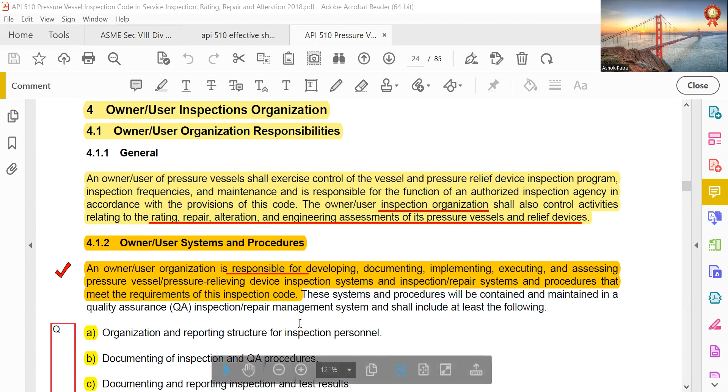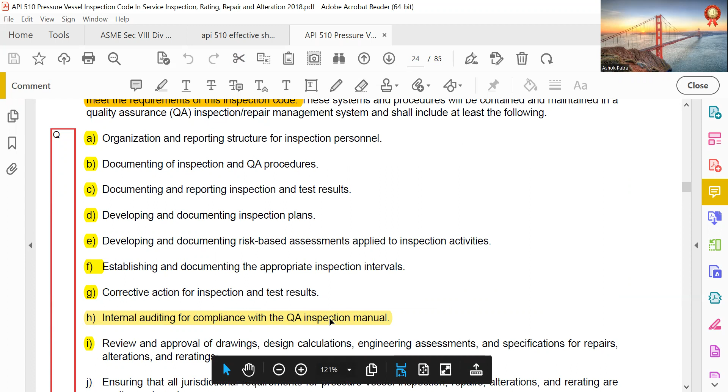So quality assurance system, inspection system will follow these things: organization and reporting structure for inspection personnel; documenting of inspection and QA procedures; documenting and reporting inspection and test results; developing and documenting inspection plans; developing and documenting risk-based assessment applied to inspection activities; establishing and documenting the appropriate inspection intervals; corrective action on inspection and test results, internal auditing and compliance with the QA inspection manual; review and approval of drawing, design, calculation, engineering assessment, and specification for repairs, alteration, and re-rating.

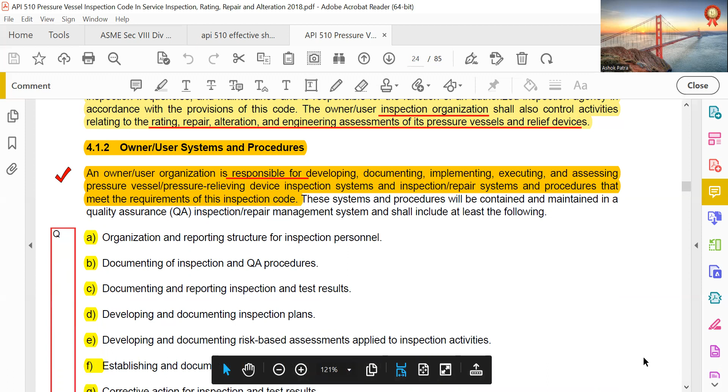Organization and reporting structure for inspection personnel. Documenting of inspection and QA procedures. Documenting and reporting inspection and test result. Developing and documenting inspection plans. Developing, documenting risk-based assessment applied to inspection activities. Establishing and documenting the appropriate inspection intervals. Corrective action for inspection and test results. Internal auditing for compliance with QA inspection manual. Review and approval of drawing, design calculations, engineering assessment, and specification for repair, alteration, re-rating.

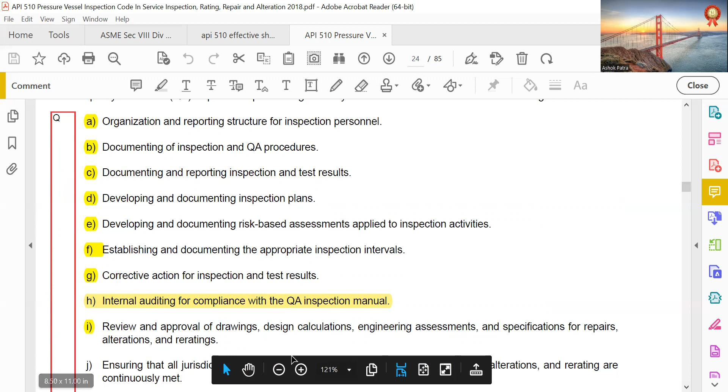Ensuring that all jurisdictional requirements for pressure vessel inspection, repairs, alteration, and re-rating are continuously met. Reporting to the inspector any process changes or other conditions that could affect pressure vessel integrity. Training requirement for inspection personnel regarding inspection tools, techniques, and technical knowledge base.

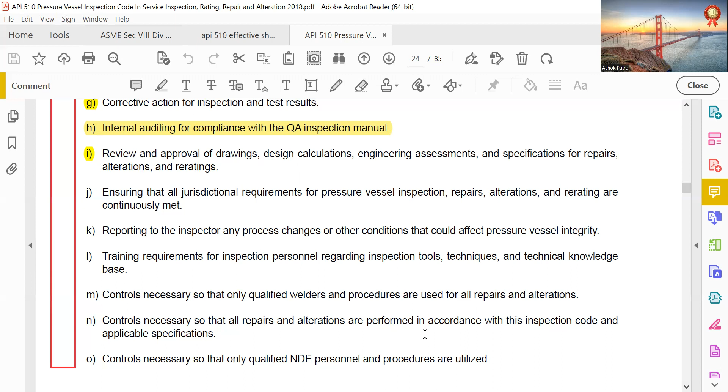Controls necessary so that only qualified welders and procedures are used for all repairs and alterations. Controls necessary so that all repairs and alterations are performed in accordance with this inspection code and applicable specifications. Controls necessary so that only qualified NDE personnel and procedures are utilized. Controls necessary so that only material conforming to the applicable construction code is utilized for repairs and alterations.

Controls necessary so that all inspection, measurement, NDE, and testing equipment are properly maintained and calibrated. Controls necessary so that the work of the contract inspection or repair organization meets the same inspection requirements as the owner user organization. Internal auditing requirements for QC system for pressure relieving devices. Control necessary to ensure that inspectors have the visual acuity necessary to perform their assigned inspection tasks.

Management shall have an appropriate requirement and work process to ensure that inspectors have an annual vision test to ensure that they are capable of reading standard J1 letters on standard Jaeger test type charts for near vision.

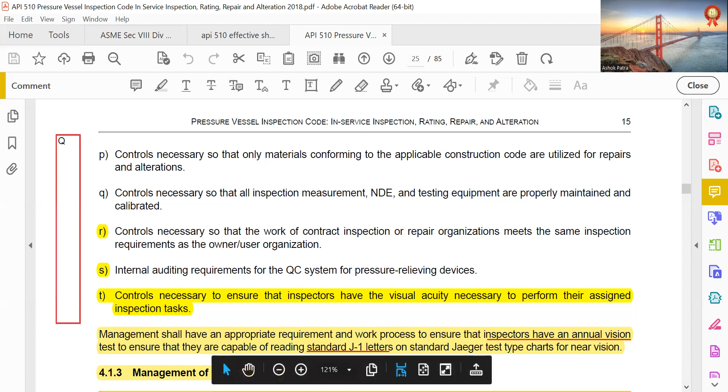Management of change, MOC. The owner user is responsible for implementing and execution of an effective MOC process that reviews and controls changes to the process and to the hardware. An effective MOC review process is vital to the success of any pressure vessel integrity management program, as it allows the inspection group to be able to address issues concerning the adequacy of pressure equipment design and current condition for the proposed changes and anticipated changes in the corrosion and other type of damage, and to update the inspection plan and records to account for those changes.

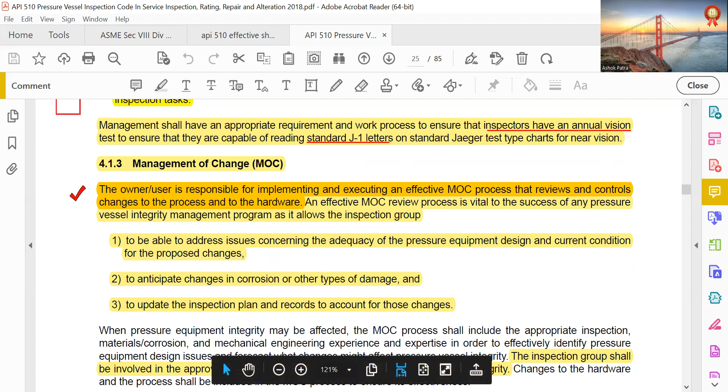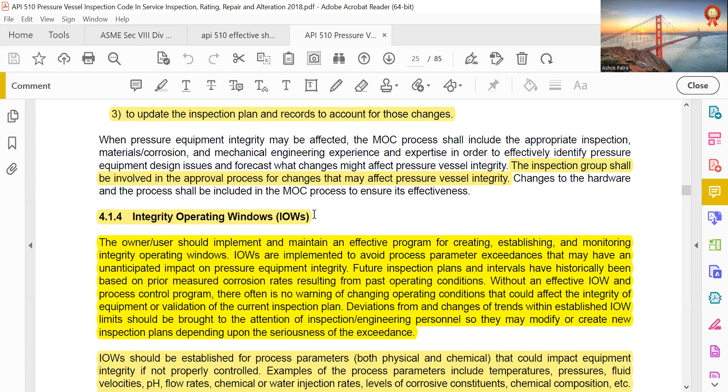The inspection group shall be involved in the approval process for changes that may affect pressure vessel integrity, operating windows, IOW. The owner users should implement and maintain an effective program for creating, establishing, and monitoring integrity operating windows. IOWs are implemented to avoid process parameter exceedance that may have an unanticipated impact on pressure equipment integrity.

Future inspection plan intervals have historically been based on the prior measured corrosion rates resulting from past operating conditions. Without an effective IOW and process control program, there is often no warning of changing operating conditions that could affect the integrity of the equipment or validity of the current inspection plan.

Deviation from the changes or of trends within the established IOW limits should be brought to the attention of inspection engineering personnel, who may modify or create new inspection plans depending upon the seriousness of the deviation. IOW should be established for process parameters, both physical and chemical, that could impact equipment integrity if not properly controlled. Examples of process parameters include temperature, pressure, fluid velocities, pH, flow rates, chemical and water injection rates, level of corrosive constituents, chemical composition, etc.

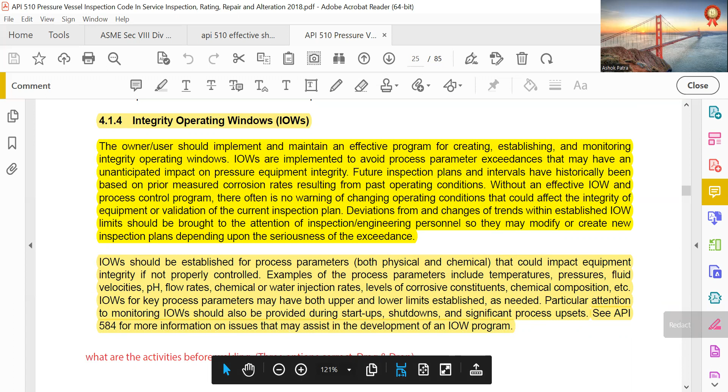What are the activities before welding? Three options correct, drag and drop.

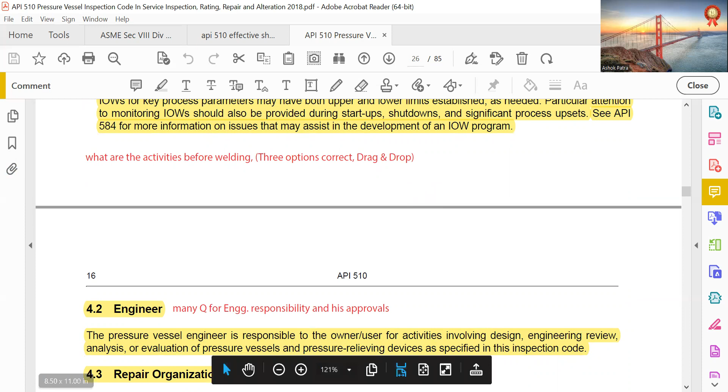Engineer. Responsibility and the approvals. The pressure vessel engineer is responsible to the owner user for activities involving design, engineering, review, analysis, or evaluation of pressure vessels and pressure relieving devices as specified in the inspection code.

The repair organization. All repairs and alterations shall be performed by a qualified repair organization. The repair organization is responsible to the owner user and shall provide the material, equipment, QC, and workmanship necessary to maintain and repair the vessel or pressure-relieving devices in accordance with the requirements of the inspection code.

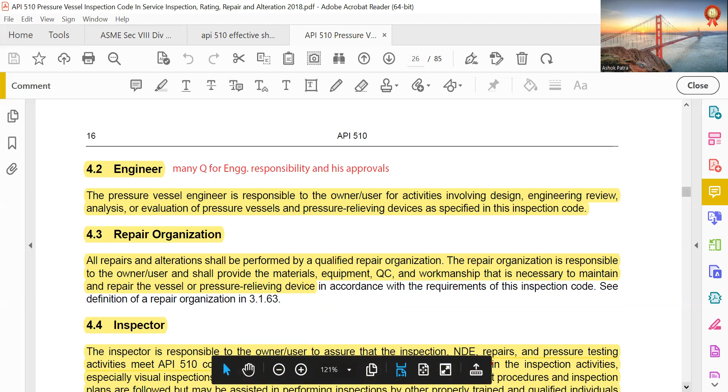Inspector. The inspector is responsible to the owner user to assure that the inspection, NDE, repairs, and pressure testing activities meet API 510 code requirements. The inspector shall be directly involved in the inspection activities, especially visual inspection, and in most cases will require field activities to ensure that procedures and inspection plans are followed.

The inspector may be assisted in performing inspections by other properly trained and qualified individuals who are not inspectors—examiners and operating or maintenance personnel. However, all NDE results shall be evaluated and accepted by the inspector, who will then make appropriate recommendations for repair, replacement, or fitness for continued service.

The inspector shall be certified in accordance with the provisions of Annex B. The inspector can be an employee of the owner user or be a contractor acceptable to the owner user.

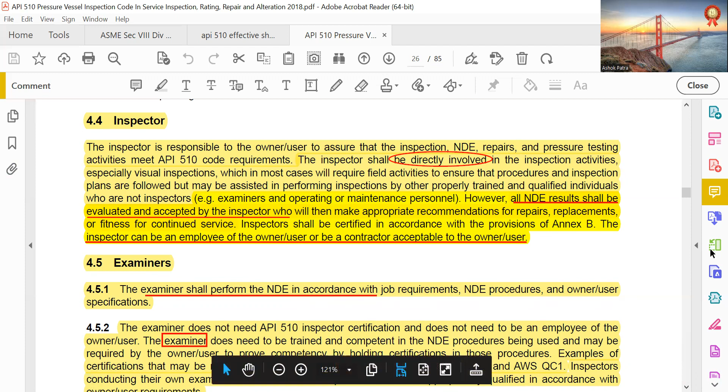Examiner. The examiner shall perform NDE in accordance with job requirements, the NDE procedure, and the owner user specification. The examiner doesn't need API 510 inspector certification and doesn't need to be an employee of the owner user.

The examiner does need to be trained and competent in the NDE procedure being used, and may be required by the owner user to prove competency by holding certification in those procedures. Examples of certifications that may be required include SNT-TC-1A, ASNT CP-189, CGSB, and AWS QC1.

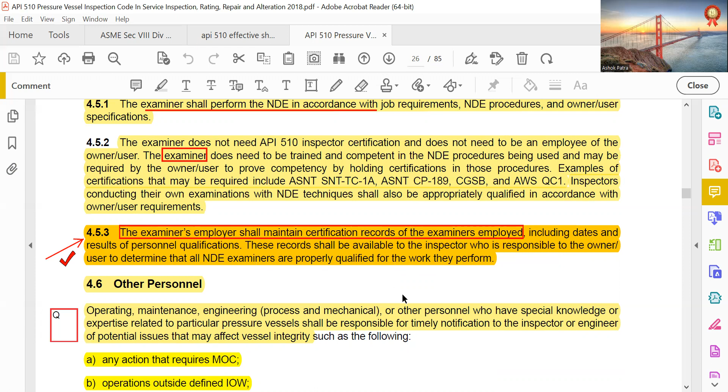Inspectors conducting their own examinations with NDE techniques shall also be appropriately qualified in accordance with owner user requirements. The examiner's employer shall maintain certification records of the examiners employed, including dates and results of the personnel qualification. These records shall be available to the inspector, who is responsible to the owner user to determine all NDE examiners are properly qualified for the work they perform.

Other personnel. Operating, maintenance, engineering, process and mechanical, or other personnel who have special knowledge or expertise related to a particular pressure vessel shall be responsible for timely notification to the inspector or engineer.

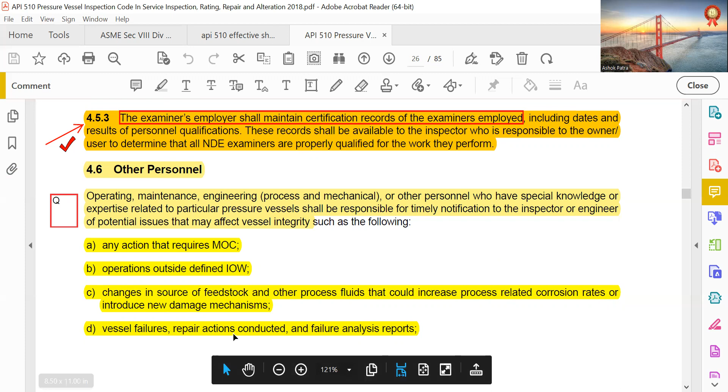Of potential issues that may affect vessel integrity, such as the following: any action that requires MOC, operations outside defined IOW, changes in source of feedstock and other process fluids that could increase process related corrosion rates or introduce new damage mechanisms, vessel failures, repair actions conducted, and failure analysis reports.

Cleaning and decontamination methods used, or other maintenance procedures that could affect pressure vessel integrity. Reports of experience that may come to their attention that other plants have experienced similar or same service pressure vessel failures. Any unusual conditions that may develop: noises, leaks, vibration, movement, insulation damage, external vessel deterioration, support structure deterioration, significant bolting corrosion, etc.

Any engineering evaluation, including fitness-for-service assessment, that might require current or future action to maintain mechanical integrity until the next inspection.

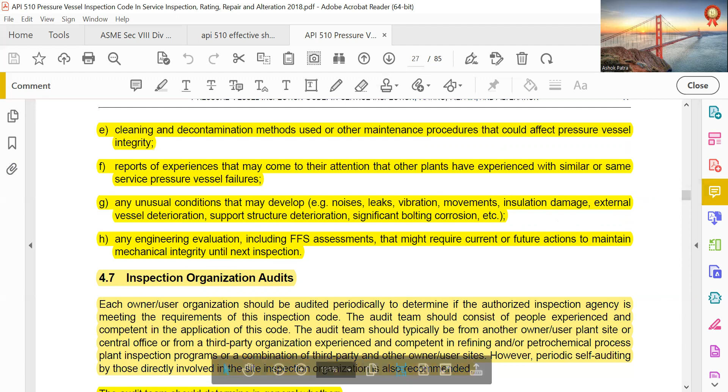Inspection organization and audit. Organization audits. Each owner user organization should be audited periodically to determine if the authorized inspection agency is meeting the requirements of the inspection code. The audit team should consist of people experienced and competent in the application of the code.

The audit team should typically be from another owner user's plant site or central office, or from a third party organization experienced and competent in refining and/or petrochemical process plant inspection programs, or a combination of third party and other owner user sites. However, periodic self-auditing by those directly involved in the site inspection organization is also recommended.

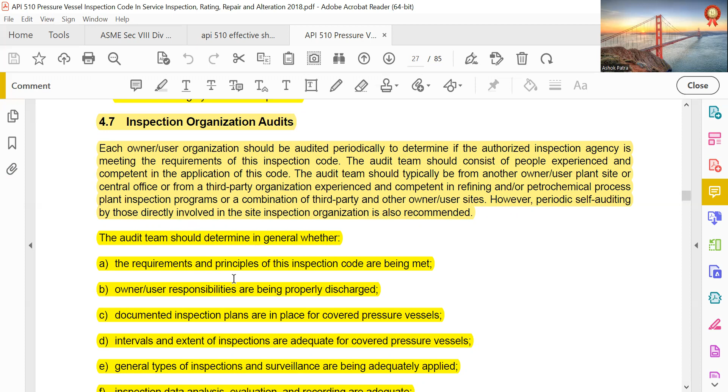The audit team should determine in general whether requirements and principles of the inspection code are being met, owner user responsibilities are being properly discharged, documented inspection plans are in place for covered pressure vessels, and intervals and extent of inspections are adequate for covered pressure vessels.

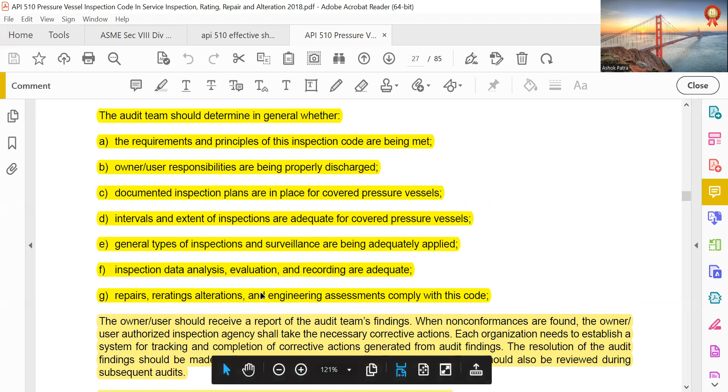General types of inspections and surveillance are being adequately applied, inspection data analysis, evaluation and recording are adequate, and repair, rating, alteration, and engineering assessment comply with this code.

The owner user should receive a report of the audit team's findings. When non-conformances are found, the owner user or authorized inspection agency shall take the necessary corrective actions. Each organization needs to establish a system for tracking and completion of corrective actions generated from audit findings. The resolution of audit findings should be made available to the audit team for review.

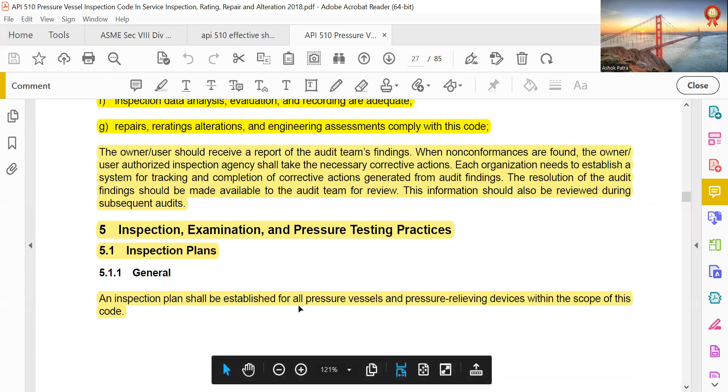This information should also be reviewed during subsequent audits, inspection, examination, and pressure testing practices. Inspection plans shall be established for all pressure vessels and pressure relieving devices within the scope of this code.

Development of an inspection plan: the inspection plan shall be developed by the inspector and/or engineer. The corrosion specialist shall be consulted when needed to designate potential damage mechanisms and specific locations where damage mechanisms may occur. The inspection plan is developed from the analysis of several sources of data.

Equipment shall be evaluated based on present or potential type of damage mechanism. The methods and extent of any inspection shall be evaluated to assure that the specified techniques can adequately identify the damage mechanism, the extent and severity of the damage, type of damage, and rate of damage progression.

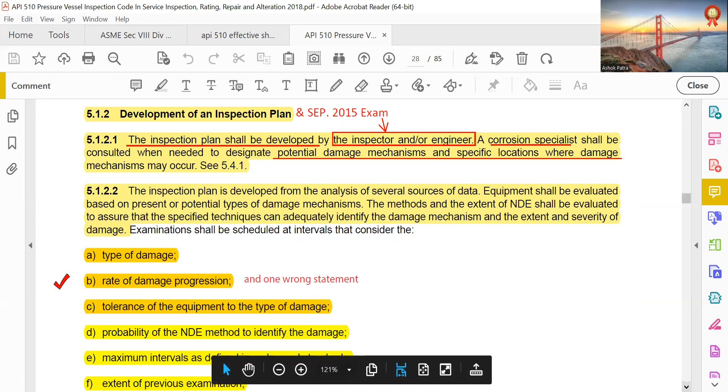Tolerance of the equipment to the type of damage, probability of the NDE method to identify the damage, maximum interval as defined by codes and standards, extent of previous examination, recent operating history including IOW exceedances, MOC records that may impact inspection plans, and RBI assessment where available.

The inspection plans shall be developed using the most appropriate sources. Inspection code inspection plans shall be reviewed and amended as needed when variables that may impact damage mechanisms and/or deterioration rates are identified, such as those contained in inspection reports or MOC documents.

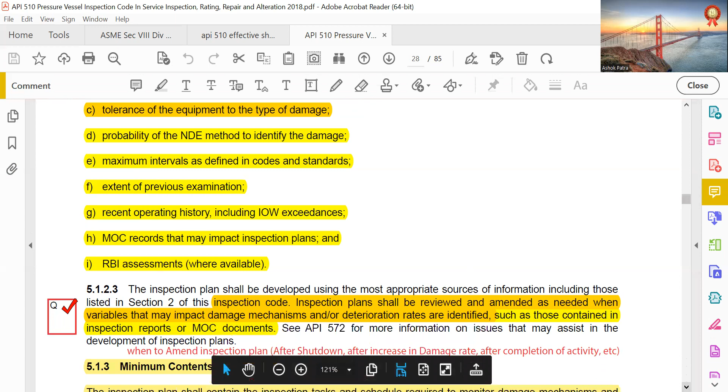When to amend the inspection plan: after shutdown, after an increase in damage rate, after completion of the activity. As for the minimum content of the inspection plan, it shall contain the inspection tasks and schedule required to monitor damage mechanisms and assure the mechanical integrity of the equipment, pressure vessel, or pressure relieving device.

Define the types of inspection needed: external and internal. Identify the next inspection date for each inspection type.

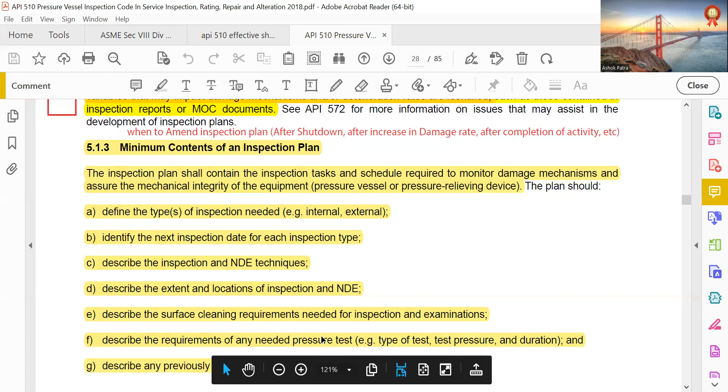Describe the inspection and NDE technique. Describe the extent and location of the inspection and NDE. Describe the surface cleaning requirements needed for inspection and examination.

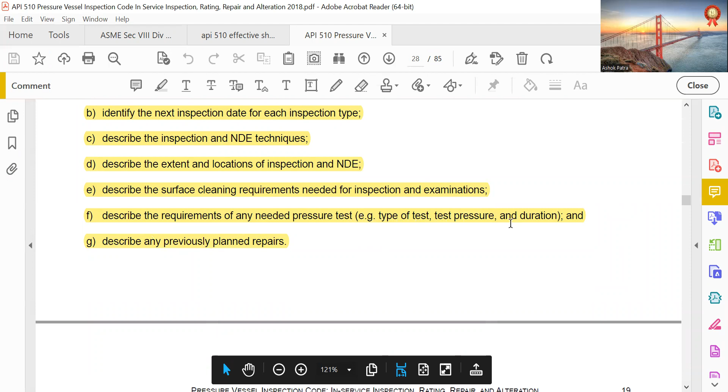Determine the requirement for any needed pressure test: type of test, pressure, duration, and describe any previously planned repairs.

Generic inspection plans based on industry standards and practice may be used. The inspection plan may or may not exist in a single document; however, the contents of the plan should be readily accessible from the inspection data system.

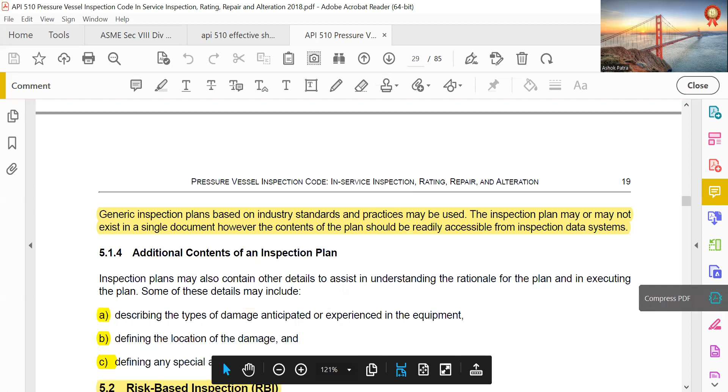Describing the type of damage, anticipated or experienced in the equipment, defining the location of the damage, defining any special access requirements — risk-based inspection, RBI.

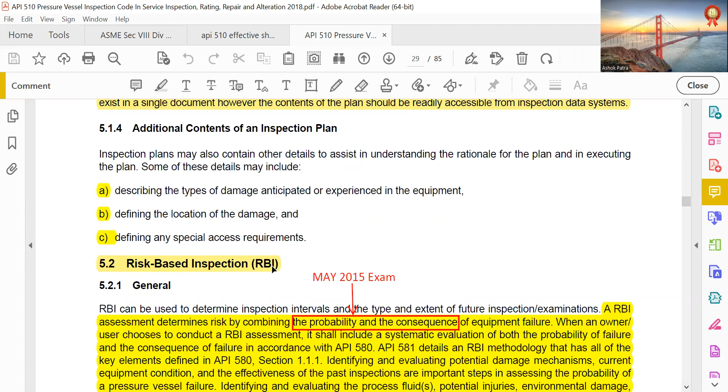RBI assessment determines risk by combining the probability and consequences of equipment failure. When an owner user chooses to conduct an RBI assessment, it shall include systematic evaluation of both the probability of failure and the consequence of failure in accordance with API 580.

API 581 details the RBI methodology that has all of the key elements defined in API 580, including identifying and evaluating potential damage mechanisms.

Current equipment condition and the effectiveness of past inspection are important steps in assessing the probability of a pressure vessel failure. Identifying and evaluating the process fluids, potential injuries, environmental damage, and equipment downtime are important steps in assessing the consequences of a pressure vessel failure.

Identifying IOW limits for key process variables is a useful adjunct to RBI, as well as to any other method of planning and scheduling inspections.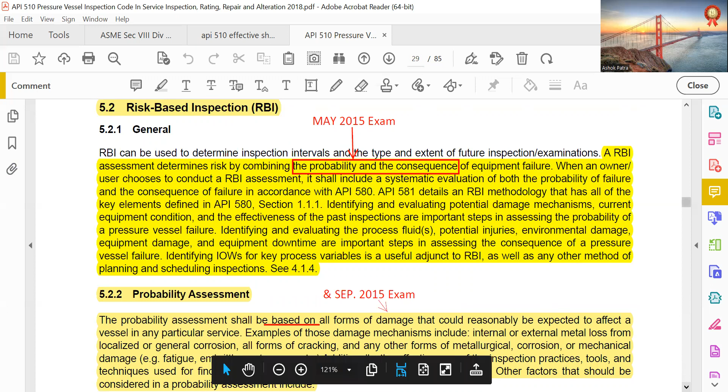Probability assessment: the probability assessment shall be based on all forms of damage that could reasonably be expected to affect a vessel in any particular service.

Examples of these damage mechanisms include internal or external metal loss from localized or general corrosion, all forms of cracking, and any other form of metallurgical or mechanical damage such as fatigue, embrittlement, and creep. Additionally, the effectiveness of the inspection practice should be considered.

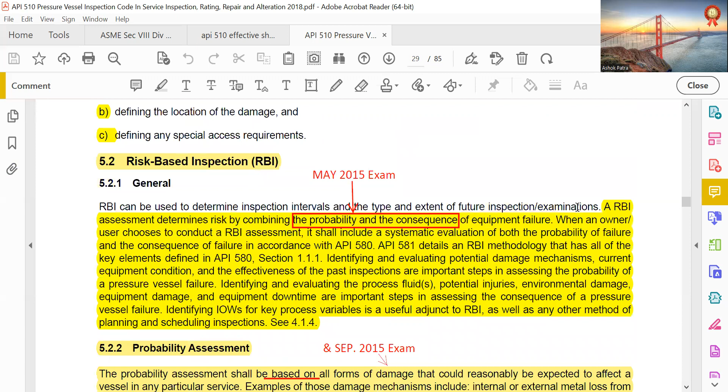Practices, tools, and techniques used for finding potential damage mechanisms shall be evaluated. Other factors that should be considered in the probability assessment include...

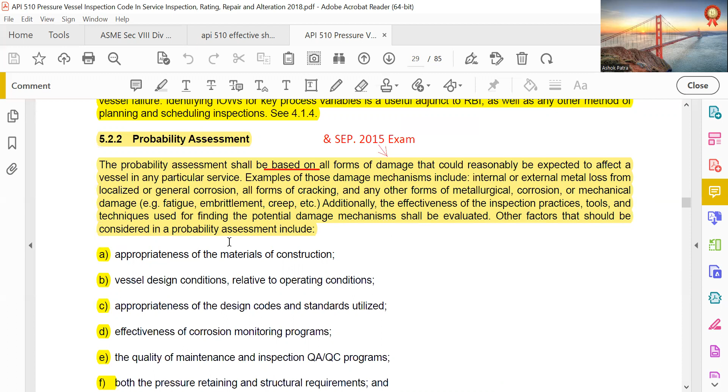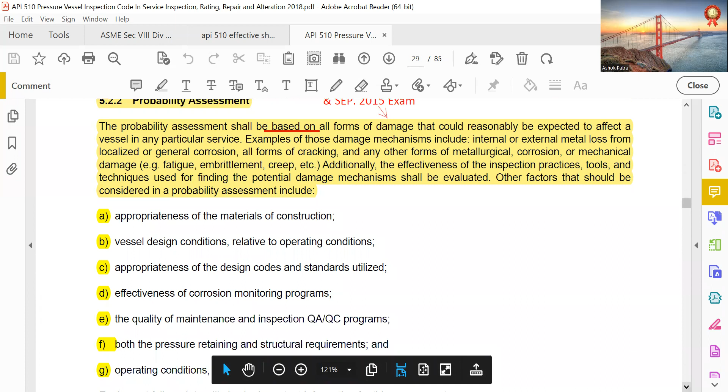Appropriateness of the material of construction, vessel design condition relative to operating condition, appropriateness of the design codes and standards utilized, effectiveness of the corrosion monitoring program, the quality of maintenance and the inspection QA/QC program, both the pressure-retaining and structural requirements and operating conditions past and projected — equipment failure data will also be important information for the assessment.